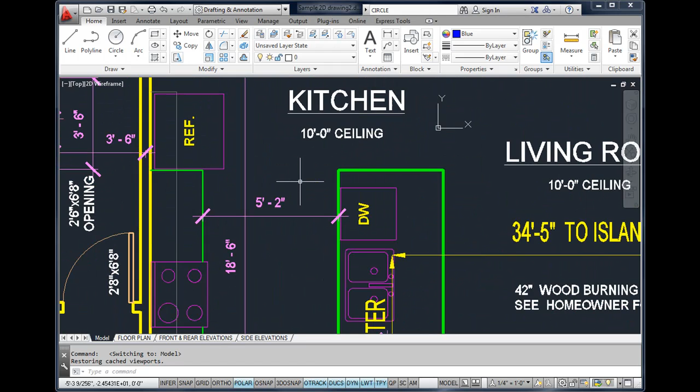If you're using a standard Microsoft IntelliMouse, it has a wheel in the center. If you spin the mouse wheel away from you, it allows you to zoom in. If you scroll the mouse wheel towards you, it allows you to zoom out. This is called zooming in and out, and it's the most efficient way of zooming in and out of a drawing.

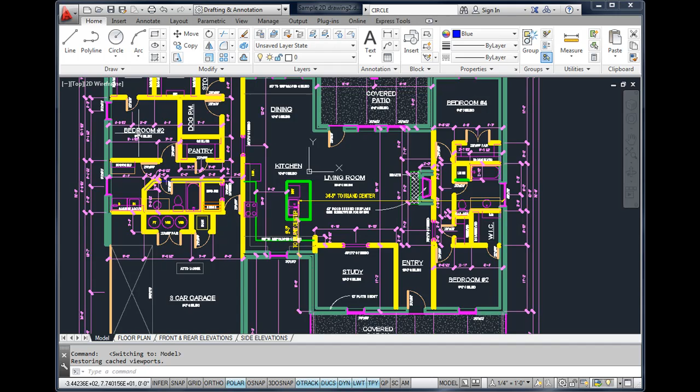If you want to zoom into a particular area, move your mouse to the area you want to view and then scroll your mouse wheel. As you notice, bedroom 2 is off the drawing.

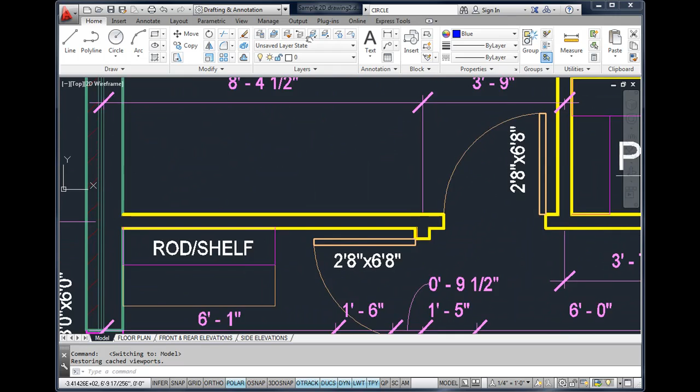We can use a feature called panning that allows us to pan across the drawing. To pan, you just hold your mouse wheel down and AutoCAD allows you to pan left, right, or in any direction. Panning allows you to quickly change positions without changing the zoom scale factor.

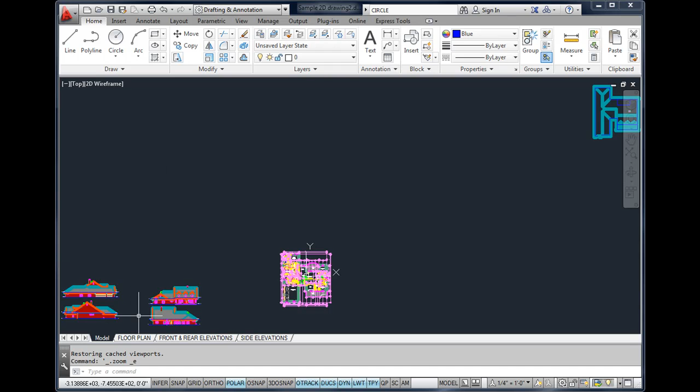Now you'll notice in the left-hand corner there are some elevation views. If you point to one of the elevations and scroll your mouse wheel forward, AutoCAD would zoom into that view. To pan it over to the right, you would hold down the mouse wheel and just move your mouse to the right. Throughout the course, this will probably be the most efficient way of panning, zooming, and viewing different parts of your drawing.

We also have, over here on the navigation bar, a set of zoom tools. If you click on this arrow, you'll see a listing of all your zoom tools, like zoom extents, zoom window, zoom all, zoom previous. So you can take advantage of those tools when working on your drawing.

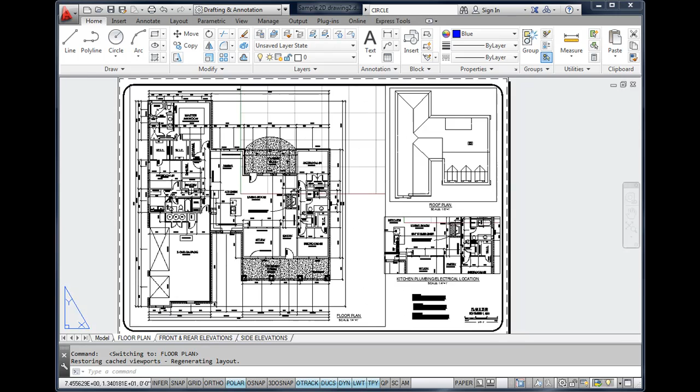On this particular drawing, we have a drawing in model space, and you'll notice there are several layout tabs across the bottom. A layout tab is a printed sheet of this particular drawing. You'll notice this drawing is set up in black and white, so when we print it, all of the colors will be printed black.

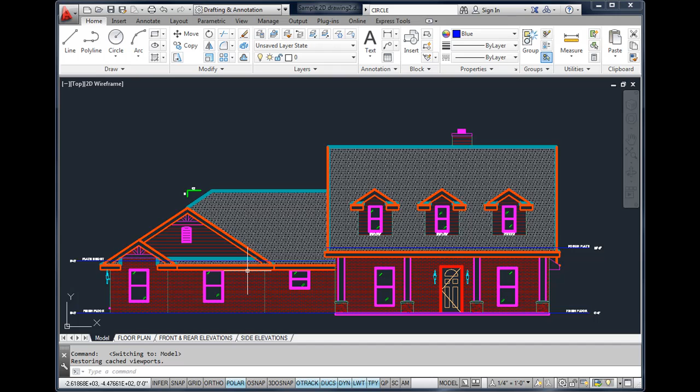So the zoom and panning work the same on these particular views also. You can click on a different layout and see a different view of that drawing. Like we said earlier, model space is where we're going to do most of our drawing and modeling, and the layout is how we would set this up to print it onto a sheet of paper. The zooming works the same way in both spaces.

In this video, we're going to look at using commands and the command line. You'll notice here on the screen I have started the circle command. Whenever you use a command, you will need to read the command line and see what AutoCAD is asking you to do. For example, on this particular command it says specify center point for circle.

AutoCAD is asking you for a center point, or it wants you to select one of the options. So let's try this and see what it does. Go up and click on the circle command, and you'll notice AutoCAD prompts me to specify the center point. In this example, you'll notice I have the command on the command line, and on the screen it's a yellow tooltip.

This is called dynamic input. It allows you to display the contents of the command line at your cursor. This allows you to visually keep your eye on the cursor instead of having to use the command line. Dynamic input can be turned on and off by clicking on the DYN button on your status bar. This button allows you to turn this particular feature on or off. At this point, I'm going to leave it on, and you may turn it off later if you need to.

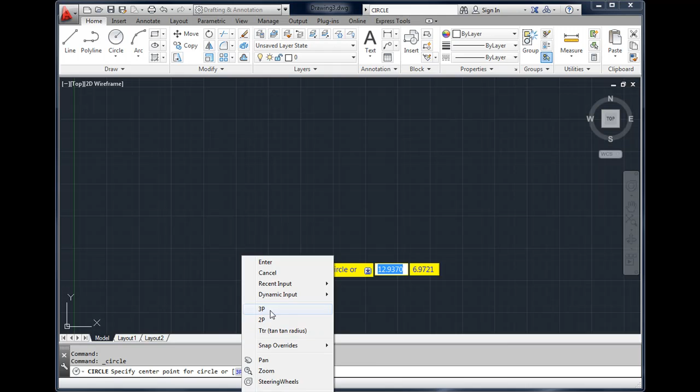There are several ways to access these options. You can click on the link, right-click, or just type in the uppercase letters. If I wanted to use the 3P option, I would type 3P. If I wanted to use the tan tan radius option, I would type the letter T and press enter. I'd recommend clicking on the link because it's faster.

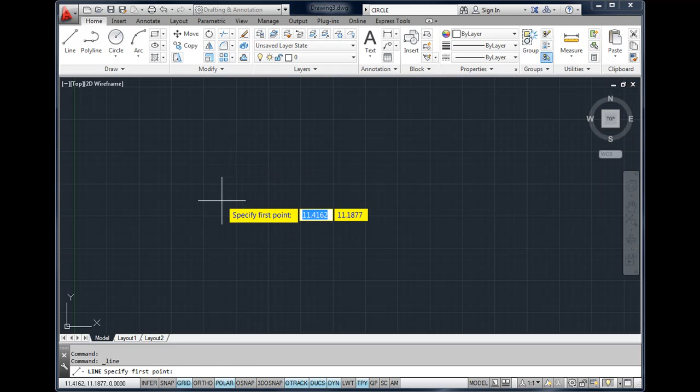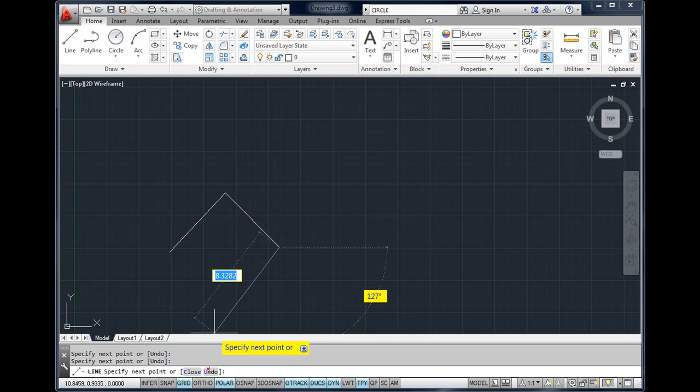Not every command will have options. For example, I'm going to start the line command, and you'll notice there are no options available; it says specify first point. Once I pick the first point, there's one option available: undo. Once I pick a second and third point, there are two options, close or undo. If you wanted to undo the last line, click on undo, and you're back to one option. If I click on a third point again and click on close, AutoCAD would close the line segment. So when you're using commands, take a look at those options.

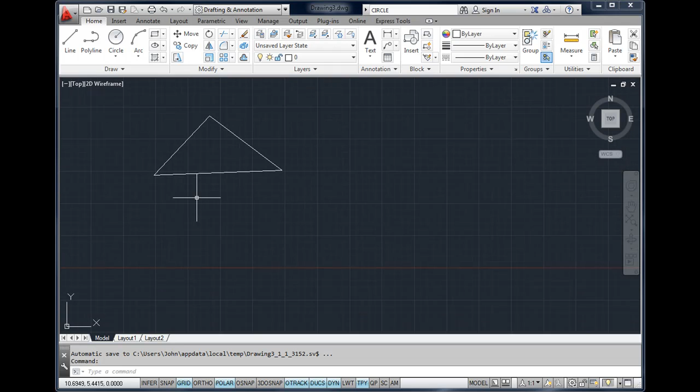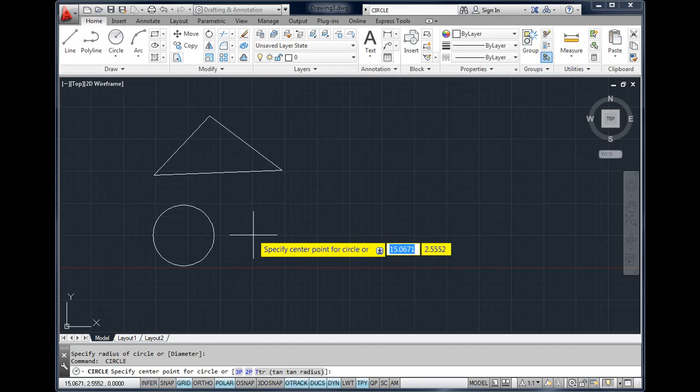Some commands will also have a default value. I'll go back to the circle command to show you. When I start the circle command, pick a center point, and drag out the radius, it says specify radius, and I'll pick a point. Now when I restart the command by hitting the spacebar or enter key, I pick a center point, and you'll notice in brackets it says 2.35. This is a default value - it's the size of the previous circle.

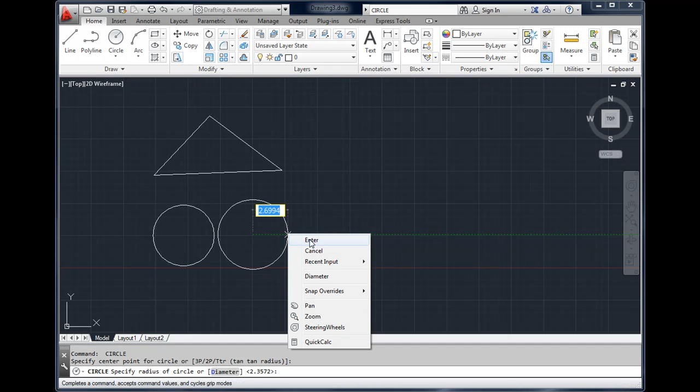If I want to use the same size circle, all I have to do is hit enter or right click and select the enter option. In fact, it's actually easier if you press the space bar or the enter key. So as you use commands in AutoCAD, take advantage of the options and the default settings.

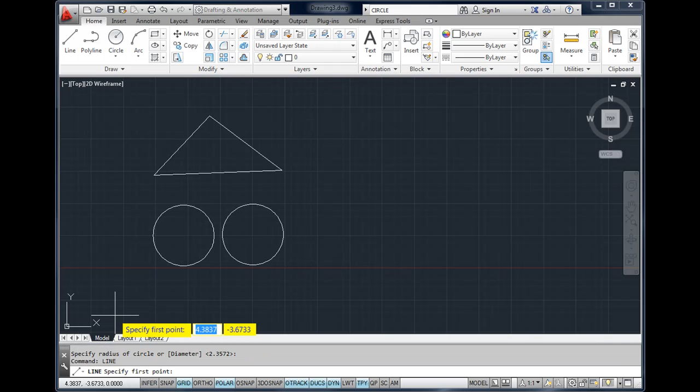Now when you're typing in a command, for example, I'll type the letter L for the line command, and you'll notice autocomplete will display. When you look through the list, you'll see the letter L and the word line in parentheses - L is an alias, a shortcut or macro for the line command. So to run the line command, just type in L and hit enter. Directly below, LA is a shortcut for the layer command. As you type in letters, autocomplete updates based on what you type.

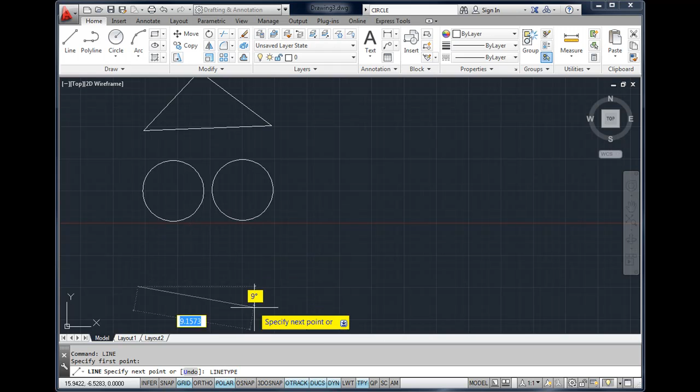So here it starts the line command, and AutoCAD prompts you for the first point, so you pick a point. As you draw, you'll notice a rubber band line, and if dynamic input is turned on, you have an edit box for the length of the line and an edit box for the angle. If I press the tab key, it allows me to toggle the angle, and as long as you're pressing tab, you can toggle between the line, the length, and the angle. I'll turn off dynamic input for this example, and you'll notice there's a rubber band line.

As you continue to draw with the line command, AutoCAD will allow you to pick points. You can undo each pick, or if you're done drawing, you can click on the close option.

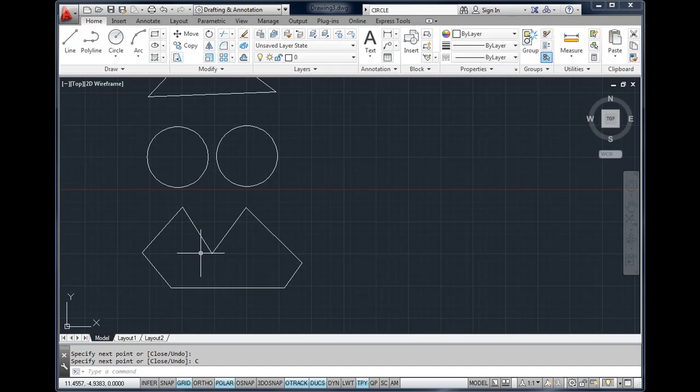To repeat a command in AutoCAD, you can press the space bar, the enter key, or right mouse click, and there's an option that says repeat line. I prefer pressing the space bar, and that way I can come in and draw a line very quickly.